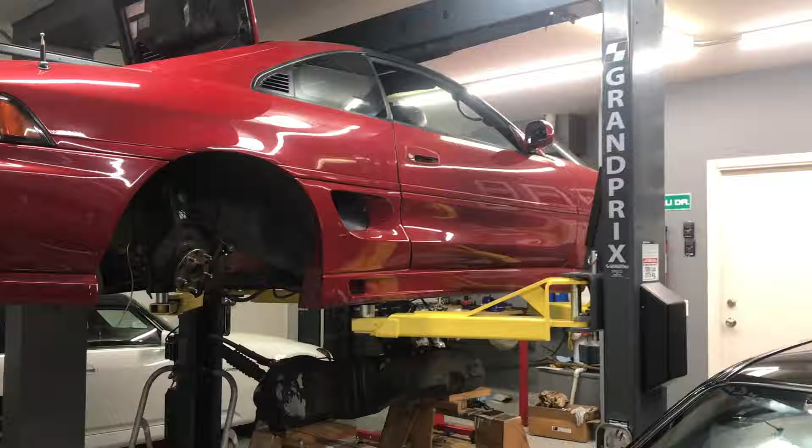Hey guys, wanted to show you a project I'm working on. 91 turbo MR2.

It's got about 200,000 miles on it, and the goal with this one is to completely go through everything. I took the Gen 2 motor out, doing a Gen 5 swap.

Doing all the suspension, the bushings, fuel pump, all the coolant hoses. Gonna clean up the tail lights, they're a little bit hazy. Some paint work. Just all the big maintenance items.

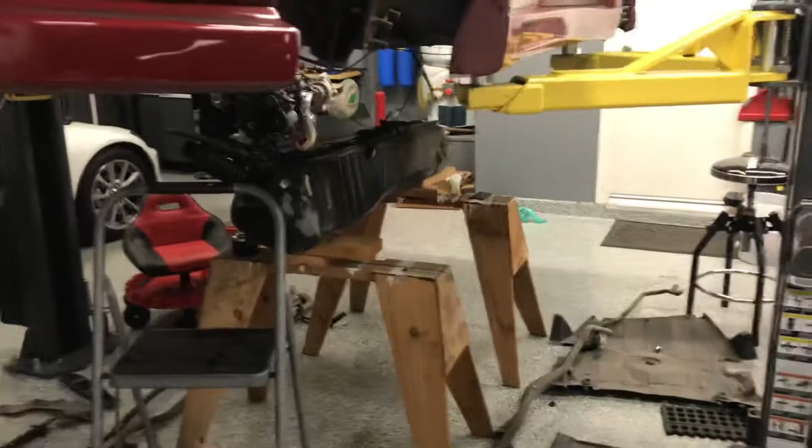As you can see right now, working on the fuel pump. I had to drop the fuel tank. That was kind of interesting. As you can see, there's tons of parts that have to come off.

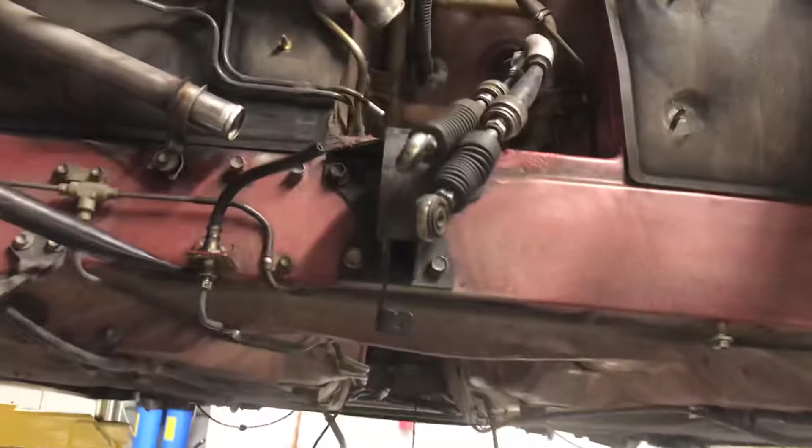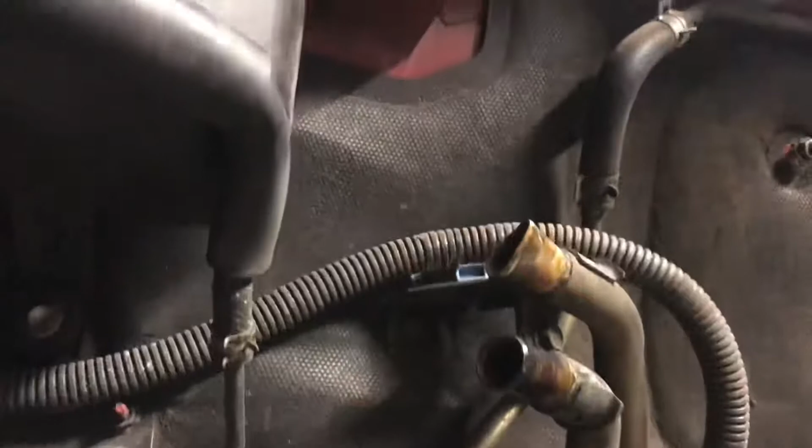Up here right now, kind of cleaning up in the engine bay, and realized that one of the hoses got crimped for the heater, so I gotta fix that. Not really looking to buy another pipe, it's like 200 bucks.

I got a side mount intercooler that I need to put in, and upgraded motor mount inserts. That's about it for in here.

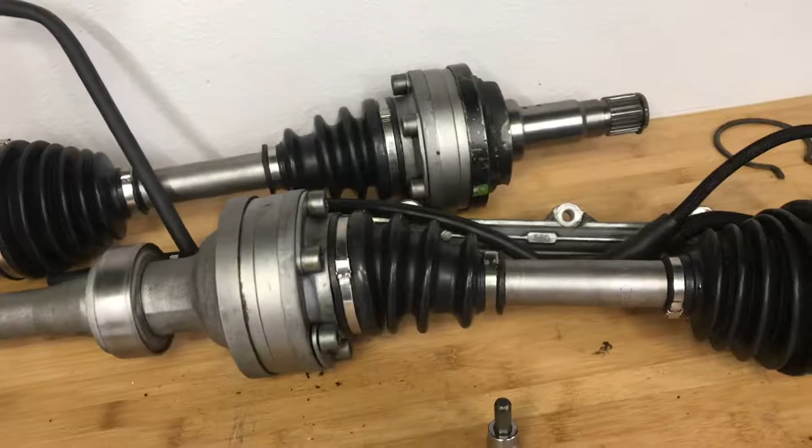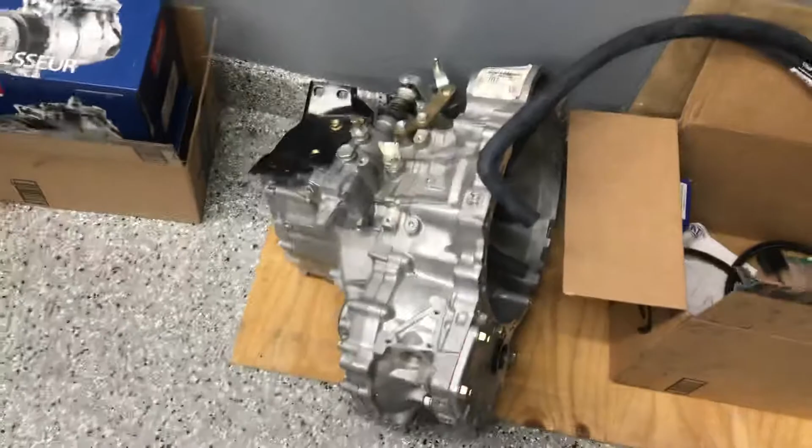New ones while I'm in there. Gonna put a new radiator. Some misc parts there to go in. That's a brand new E153 LSD transmission.

There's only about 5 or 6 left in the US, so I'm assuming that they're almost all gone, so I wanted to scoop one up before they're gone forever.

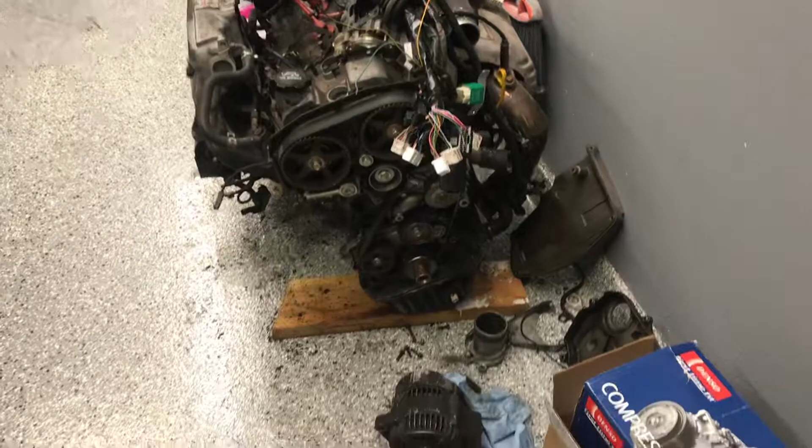Remanufactured AC compressor and alternator. It's the Gen 2 that came out. Not really sure what I'm going to do with it. It's got a E153 non-LSD tranny on it.

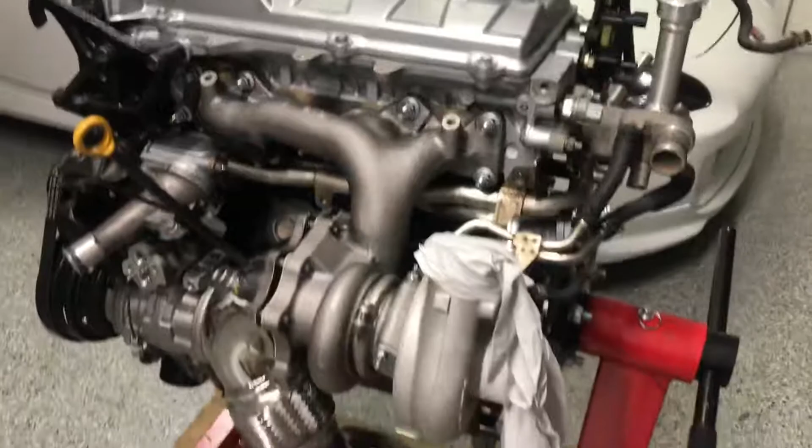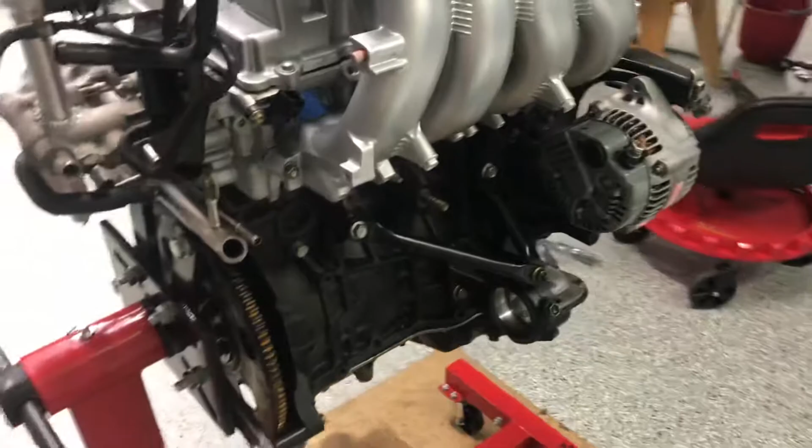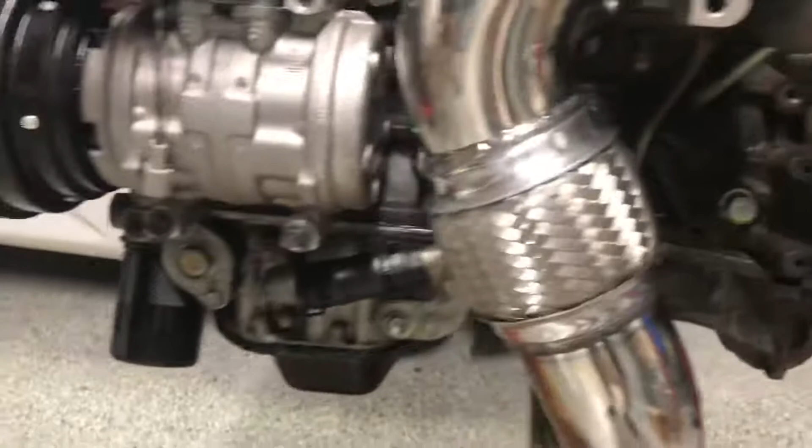There's a couple of hoses on here that are specific to this engine that are replaced. Pretty much anything that was kind of a wear item, something I just replaced so I don't have to deal with it later. Replaced this guy. There's a gasket inside here that I replaced.

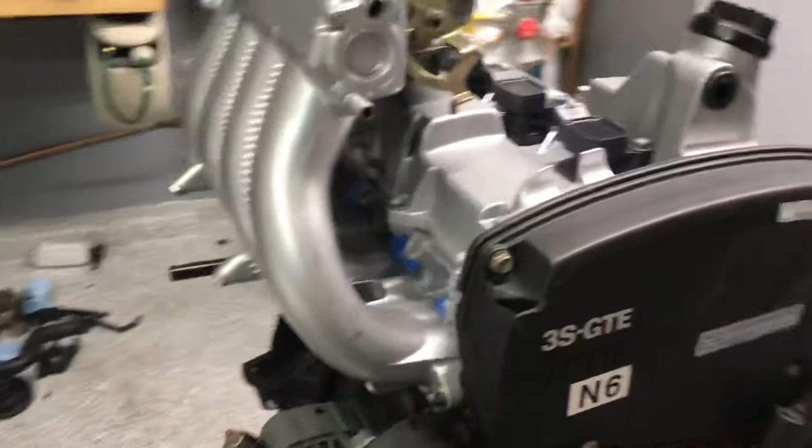It's a lot of work. A lot of work. I'm waiting for the injectors to come back, and then I'll finish putting those in and get the intake manifold back together.

The turbo's rebuilt. It's got the billet wheel from Campos, and the heads were sent out to get rebuilt. So should be a pretty healthy motor going in.

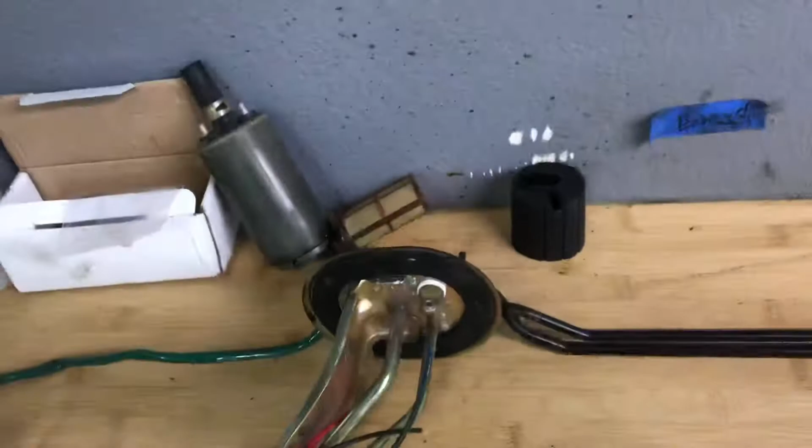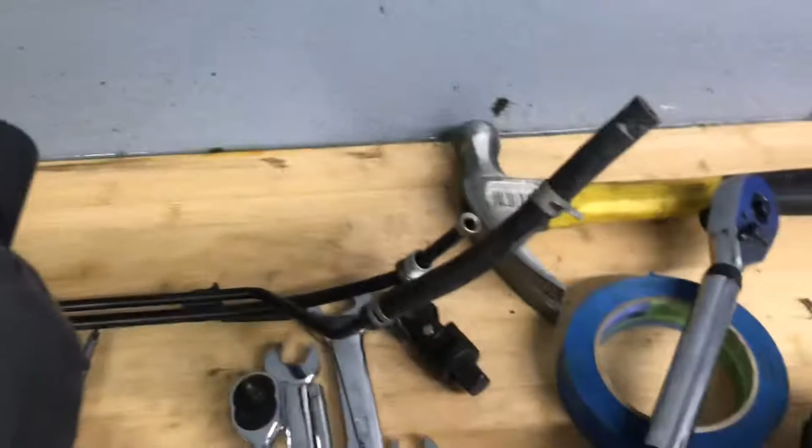New fuel pump put on. I need to get some butt connectors so that I can connect these wires, and it'll be ready to go. Replace the fuel line that's on there. And that's pretty much it.

The seats were in bad shape, got those reupholstered. I'll show those in another video. But the goal is to kind of bring this thing back to its former glory, inside and out.

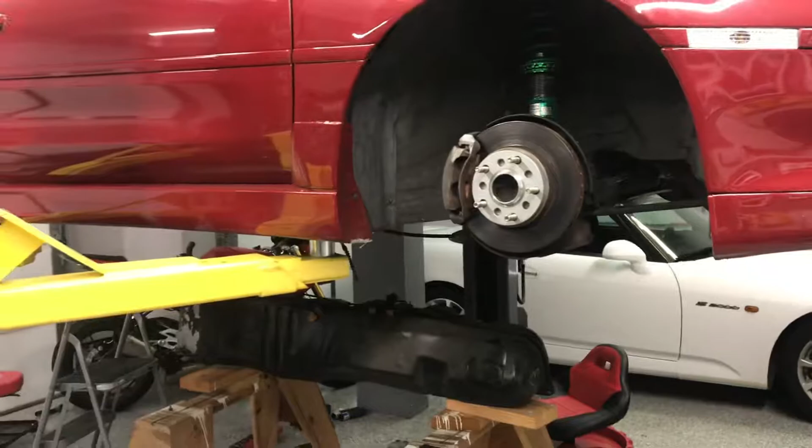Anything that's worn that I can still buy, I'll replace, so that it kind of feels like a newer MR2 and not one that has 200,000 miles on it and has been pretty much neglected.

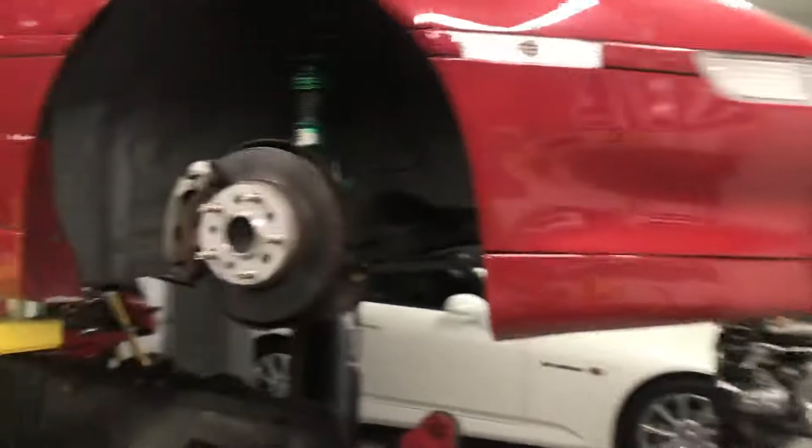I'm gonna do the wheel bearings and probably the end links. Yeah, sway bar bushings look pretty nasty. Replace those. A bunch of radiator hoses up here that I'm gonna replace too, since I'm in here.

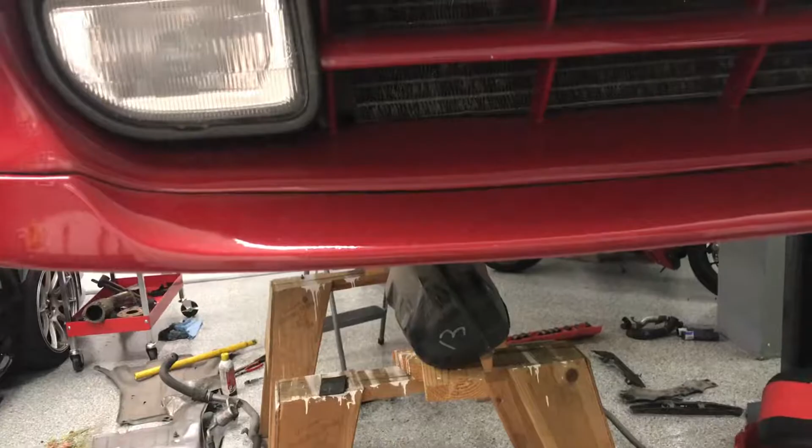I got the Subaru 2006 STI. It's my favorite car since I was like 18. Not really much to do on that. It's only got like 45,000 miles.

So I kind of got the MR2 as a project car, although it turned out to be an insanely huge project. The initial idea was to just drop the Gen 2 and do the timing belt and all that stuff, and then as I learned more about this platform, the Gen 4 and 5 make more horsepower, so there's just no reason to even mess with this.

So I spent a ton more money picking up that motor and doing everything to it, and just kind of fell more in love with this car and want to go through it entirely and make it really nice. Probably repaint it at some point and do the weather stripping and stuff.

Then my other car, I got a 2006 S2000. Really like this car, styling is kind of aggressive looking. It's a convertible and it's got the high rev limit with the VTEC. It's pretty cool, it's got the red and black interior.

It's got about 35,000 miles. It's all stock, nothing wrong with it. It's like new.

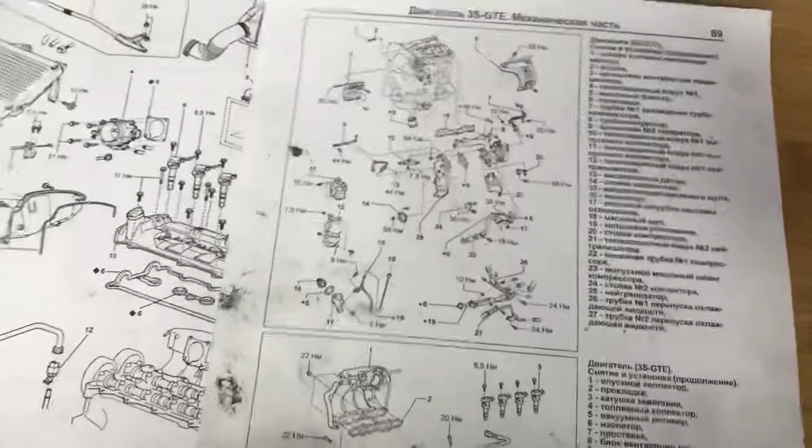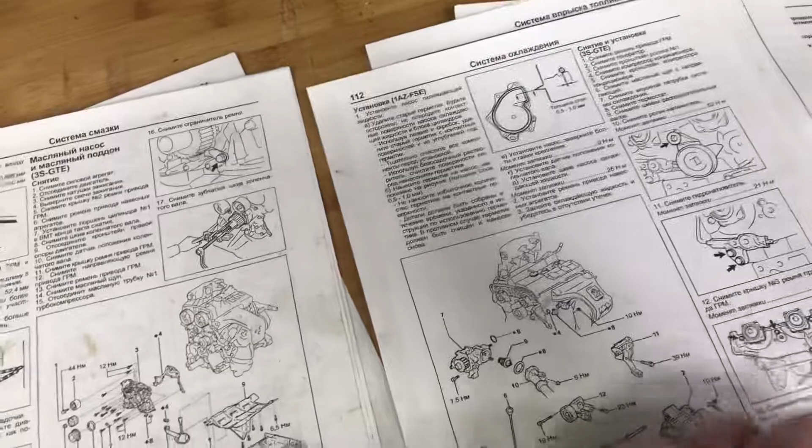So I was able to find a Caldina specific guide. It's like in Russian, but it's got a lot of the exploded parts diagrams with all the torque values, and I don't know, it's just kind of a thing that I like to do. I'm sure that the Gen 2 ones would be just fine, but for whatever reason, they increased the torque values on some of these items.

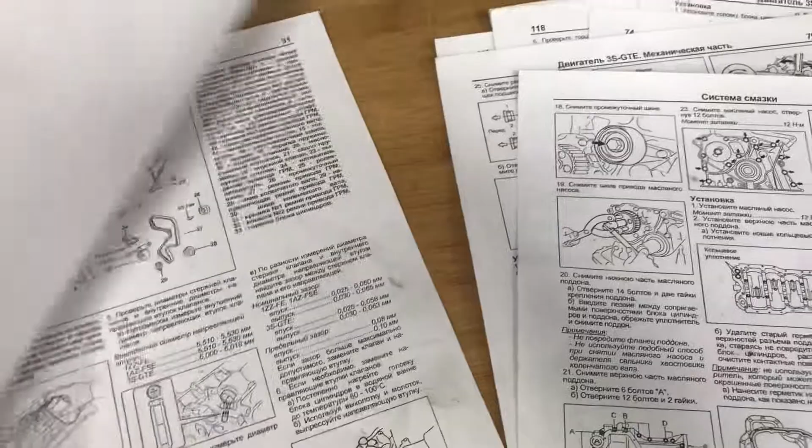I don't know if that was just something that they did towards the end of the evolution of this motor, or just because it makes more horsepower or what, but I got all of the diagrams and the step-by-step stuff here. It kind of tells you most of what you need to know. I got the full service manual on the computer, but I printed out basically what I needed to reference back and forth.

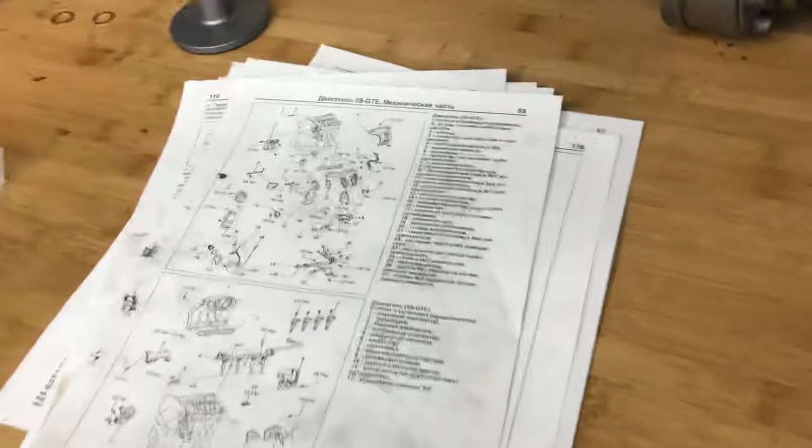So I'm putting together a list of everything that I've had to order and everything that I've had to look up, so next time I do this, and I probably will do it again, I'll have all the parts up front and we'll waste very little time.